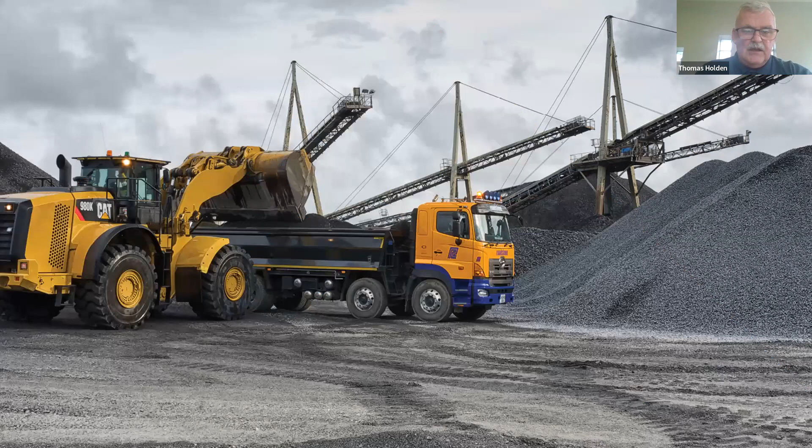The national standards have updated SR18, which is your aggregates for mortar. They've done a revision to that, published back in 2021. This brings mortar sand into line with the other aggregates for concrete and mortars, SR16 and SR21. It's gone from System 4 to 2+, so it has to be third-party certification on the production control and test results. It also set new limits on total sulfur and acid soluble limits in SR18 and SR21 - less than 1% on total sulfur and 0.2 on acid soluble limits. You need a petrographer's report and assessment of the sand pit, as with the other standards. So it's just bringing the aggregates for mortar in line with the other standards.

There's a systematic review of SR16 going on at the moment. It's ongoing - three subcommittees were formed off the main committee, looking at various aspects of SR16. They've finished up now and will be reporting back to the main committee, the Aggregates for Concrete Committee, or the Aggregates Committee in the NSAI. That'll probably go out for public consultation in the next 2 to 3 months. There are a few updates that were recommended.

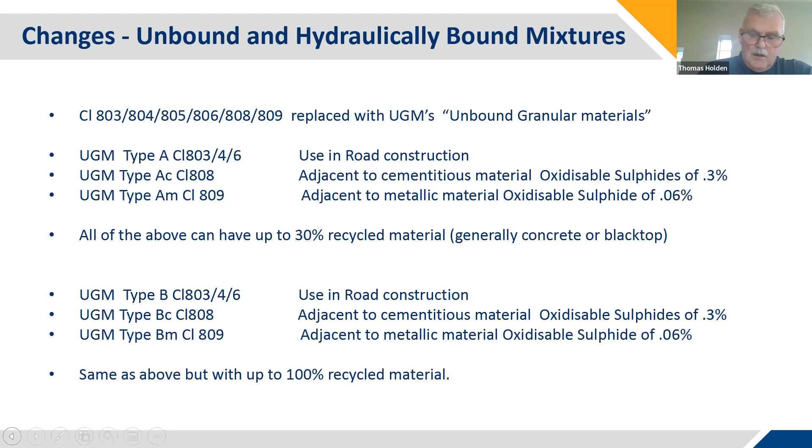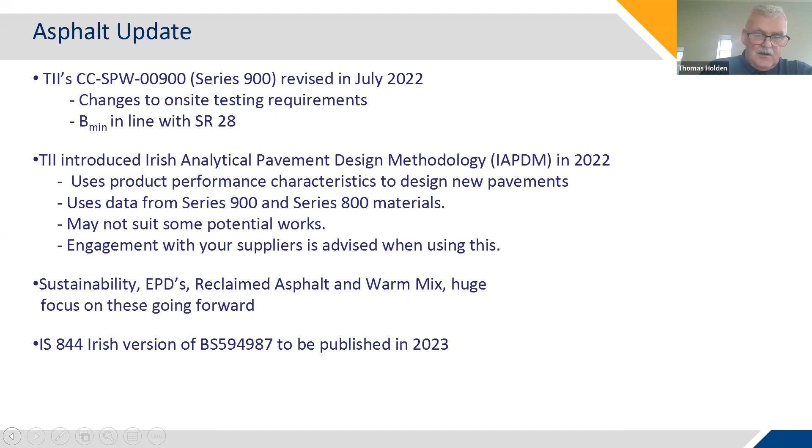The use of reclaimed asphalt, wrap, warm mix - there's huge focus on this whole area going forward in your design of roads and design of materials going down. And there's a version of the BS 594987, the IS 844, that's due to be published in 23. So that's probably gone through all the stages in the NSAI and is ready for publication.

Concrete, this is the one that I suppose there's a lot of changes coming down the road with EN 206, a revision to that. It won't be here for a couple of years yet, but when it comes, it's probably going to make a lot of changes.

They're going to split the EN 206 into two parts. Part one will cover performance requirements, factory production control, conformity criteria, and then part two will cover conformity assessment, inspection, and certification. Main reason for the division of the standard into two documents is to allow the concrete to be specified in part one and conformity in part two.

But the content's going to stay the same. It's kind of, we'll call it, changes for the sake of change and split the standard up.

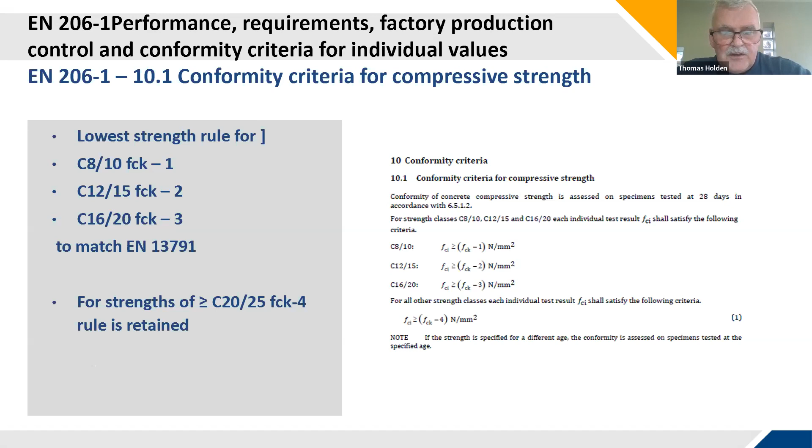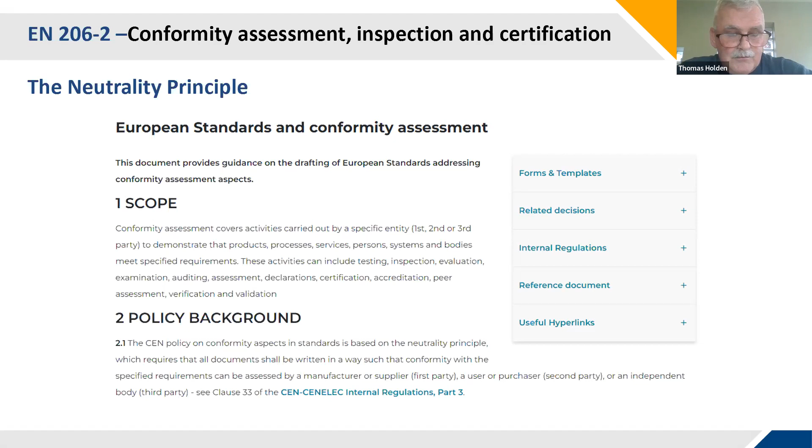The neutrality principle, again, your scope and your policy background on those two bits. For conformity assessment activities, including testing, inspection, evaluation, your auditing, assessment, declaration, certification, accreditation, peer assessment, validation, and your scope and policy background. Then for your assessment neutrality system, required documents shall be written in a way that everyone can understand them in simple terms, that all people involved in the standard or in the works would understand what the specification is about.

Now here in Ireland, every concrete producer is certified to EN 206. So you can't really supply concrete to any project unless you're certified. So I don't know where the plant without production control would be that you'd need extra testing here in Ireland. Possibly if you set up a site batching and you hadn't it certified, you'd apply the sampling rules for without production control.

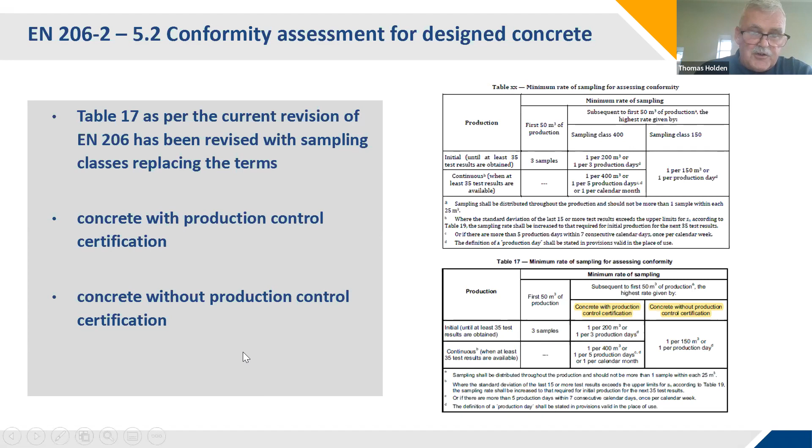Clause 10, evaluation conformity, has been removed, which is a little bit mad in my opinion, and I'm half delighted that again this thing goes out for public consultation and we draft up a new national annex to it - I'll be getting very close to retirement, because I think some of the decisions they're making in the new standards is a little bit nutty, but there you go.

And the identity testing has been removed - criteria for the mean result - and it is the responsibility of the first, second, and third party. So your supplier, your designer, your end user are going to have to agree on what level of identity testing would be required on site.

The requirement that 2 cubes are made and you take the average, that's been removed. And the requirement, the 15% rule between the 2 cubes - so if somebody makes 2 cubes and one comes in at 20 and the other comes in at 40, that's more than 15% between the two, you disregard the cubes or disregard the lowest cube. But that rule is gone now.

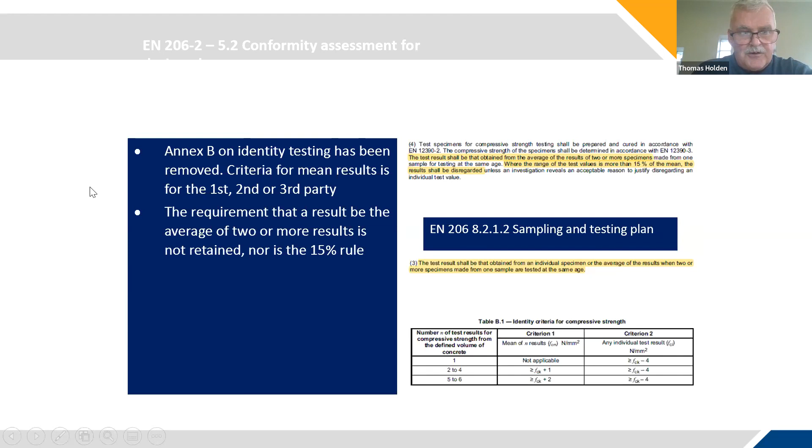Again, just to repeat what we said, that's criteria for mean result, your +4 - that's the same, and your 1.4 times standard deviation is the same.

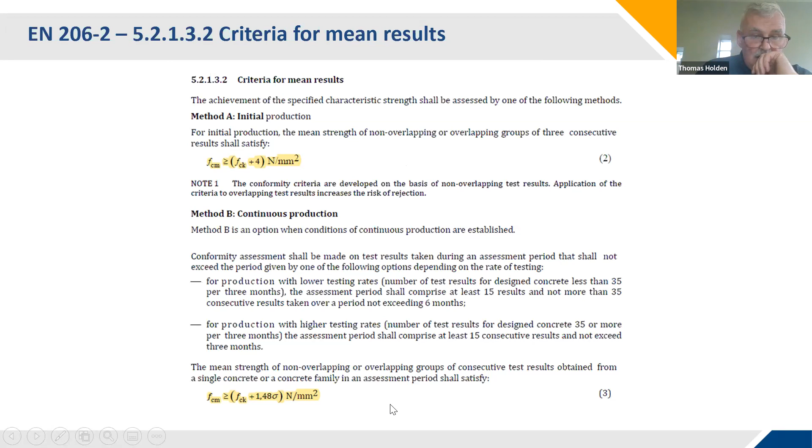Okay, your new classes of durability classes are also being proposed, where you would have exposure resistance classes.

So in Ireland, we have our durability table based on limiting values, and your holy trinity of minimum cement, strength class, and water cement ratio, and then you add in cover on that as your limiting values. But if you're going performance based or deemed to satisfy limiting values, I don't know how we're all going to agree on those limits.

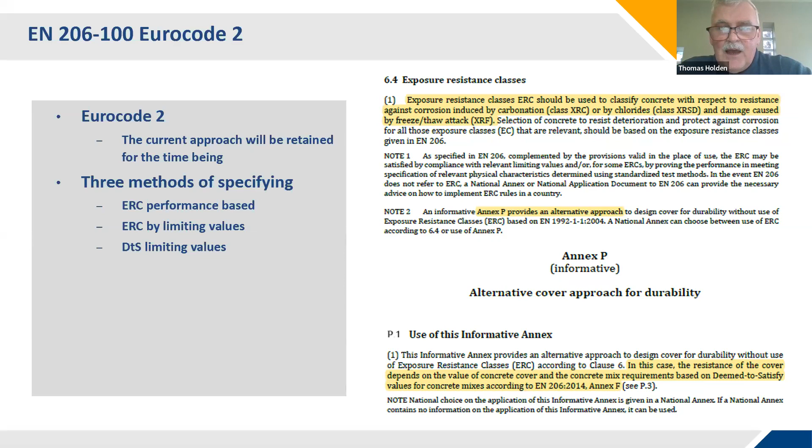It's very simple at the moment - everyone working off the tables in EN 206, the National Annex, and we work into limiting values. But this will only be for your carbonation and your chloride classes, freeze-thaw and sulfate resistance will still be based on your limiting values.

But performance based, we'll say for carbonation - all the stakeholders: your concrete producer, your main contractor, your subcontractor pumping the concrete, another subcontractor placing the concrete, another subcontractor putting up the shutters. He'll want to take them down, strike it at 14 hours. And does he cure the concrete, or what happens to the concrete when it's stripped?

And we're basing the carbonation performance on laboratory test results, probably done by academics in a college. Not that there's anything wrong with that most of the time, but with all your stakeholders involved, if you don't get the carbonation requirement right and the steel starts to corrode before your design life, out of all the stakeholders, who's going to be blamed and who's going to still be standing?

You're probably not going to get several of the subcontractors - the guy who watered down the concrete to pump it, or the guy who placed it and didn't vibrate it properly, the curing of the concrete, what broke down - and you've based your design life on exposure resistance class.

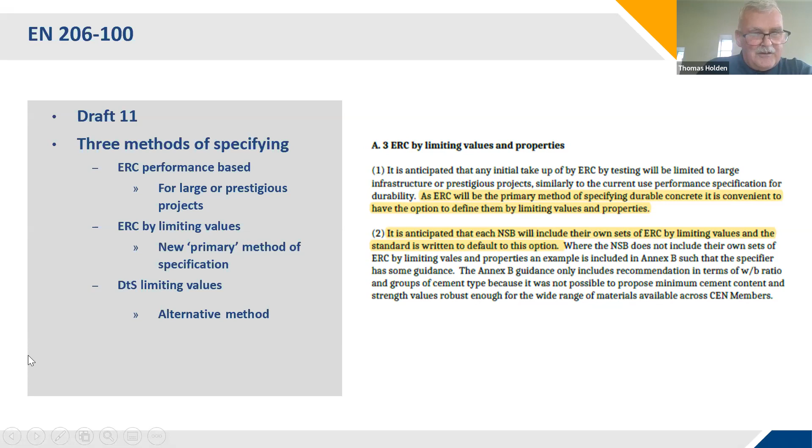Anyway, we'll move on - a bit on stone, a bit on blacktop, a bit on concrete. We'll move on to blocks, and as I'm the technical manager for concrete products, this is where the remainder of this presentation will hone in on blocks.

Back last year in April, the Department of Housing and Local Government published a guide to the marketing and use of aggregate concrete blocks to EN 771 Part 3 in Ireland. The background of this document is that the department felt that blocks, due to problems happening around the country, mainly in the northwest, needed a bit of scrutiny. So they set up a market surveillance team.

Market surveillance was set up probably 3 years ago. They started to audit block manufacturers, didn't find a whole lot wrong with the block production as such, but they did find that the DOP and the CE mark for the product were varied across the country - not discrepancies as such, but they weren't uniform documents. The layout of a declaration of performance is set in Europe in a certain way, with certain numbering systems and information that has to be declared. So market surveillance reported this back to the department, and the department then published this document.

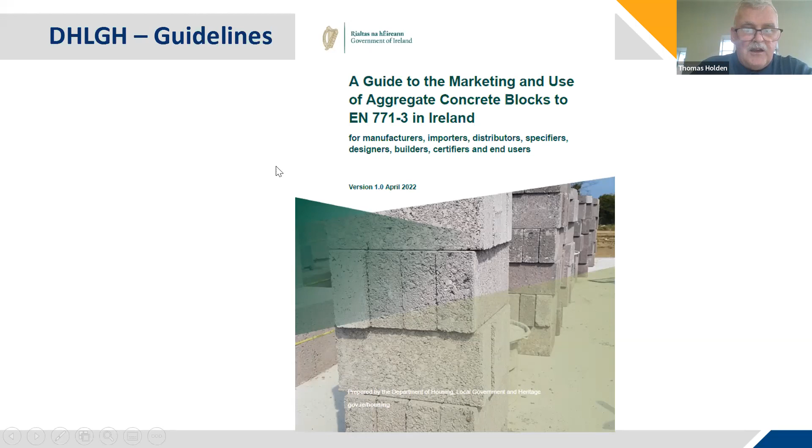It's a very useful document, goes through a lot of information for all parties. Your standard here is 771 Part 3 - that's your specification for concrete blocks, amended in 2015. The introduction of aggregate concrete blocks within the scope of 771 must have a declaration of performance and a CE mark, in place since July 2013 when BCAR came in. We adopted the construction products regulations back in 2011, made law in 2012-13. So every block producer in Ireland must produce a declaration of performance and the CE mark as a separate document, and that should have been happening since 2013. It was happening, but the documents weren't in the proper layout displaying exactly the right information.

So here's the information on the CPR. As I said, the regulation came into being in 2011, and that sets out everybody's responsibilities and the rules, regardless of where the products are manufactured - Ireland, EU member states, Northern Ireland, Great Britain, or other third countries. That's not just for concrete blocks, that's for all construction materials. It was adopted fully into Irish law in July 2013. So 9 years later, a clarification on what a concrete block should be and what it should be supplied to was printed by the department.

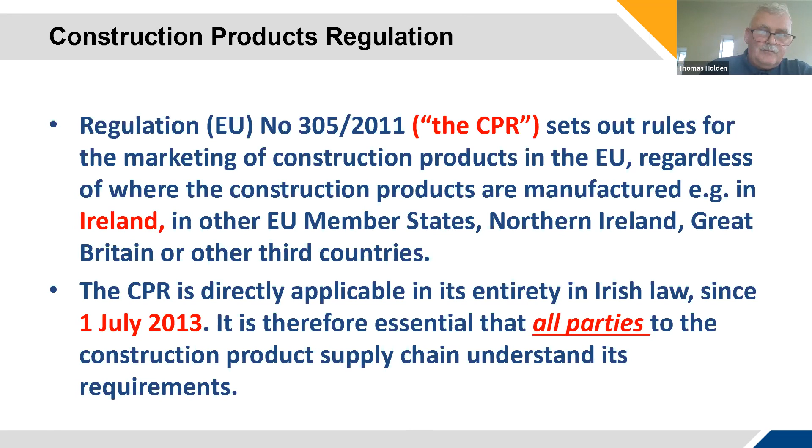Then the block goes to site, and it should be built to the building regulations - workmanship, materials fit for purpose, conditions of use, proper installation, and compliance with building regulations. These are all the responsibility of the owner, builder, specifier, designer, and certifier. The manufacturer is responsible for producing the block and declaring its properties to the standard. So if you're a manufacturer, importer, or distributor of the material, you're responsible for making the block to the standard, declaring the performance, and having a CE mark available. Enforcement of production is market surveillance, and enforcement of all the rest is building control. So that sets out the obligations very clearly for everyone.

National provisions - this is just a description of it - are standard recommendations that set out appropriate minimum performance levels. They're known as national provisions and can be found in guidance documents, technical guidance documents to the building regulations. So the majority are set out there, and they refer you to the Eurocode and to SR 325. They give minimum densities of block for sound and durability requirements in Part E and D. So we have a lot of national provisions, and they can all be found and traced from building regulations, technical guidance documents, out to the SRs, out to the ENs and codes of practice, and they're all there and should be used.

SR 325 is very important, there's a lot of information in it. Again, SR 325 and Part A, the building regulations, state that blocks in Ireland should be Category 1, meaning you're third-party certified to produce blocks. A notified body, the NSAI is one notified body, SLR is another, there's probably 2 or 3 notified bodies working in Ireland. Roadstone tend to predominantly use the National Standards Authority of Ireland, but you can't produce blocks in Ireland compliant with the building regulations unless you're certified to do so by a third party.

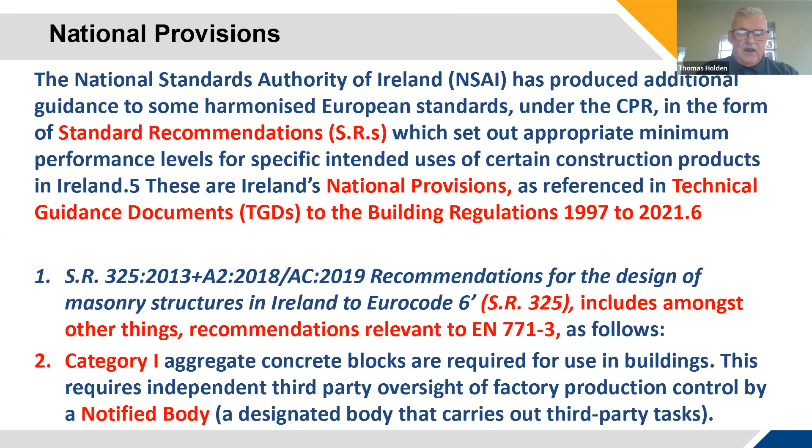Aggregate concrete blocks intended to be used in elements with structural requirements are required to meet the prescribed performances set out in SR 325. So density, compressive strength, moisture movement are the 3 that are in SR 325. The mortar classes are there. Achieve appropriate durability for finished work in Ireland, that's set out in 325 as well. And the aggregate used in the blocks has to be compliant and certified to 12620, aggregates for concrete, and the national provision set out in SR 16.

Again, you have to be certified to make the blocks, and you have to produce the blocks with certified material. So your sulfate levels, your magnesium sulfate soundness test, and your hardness test are all set out and provided as national provisions within the SR 16.

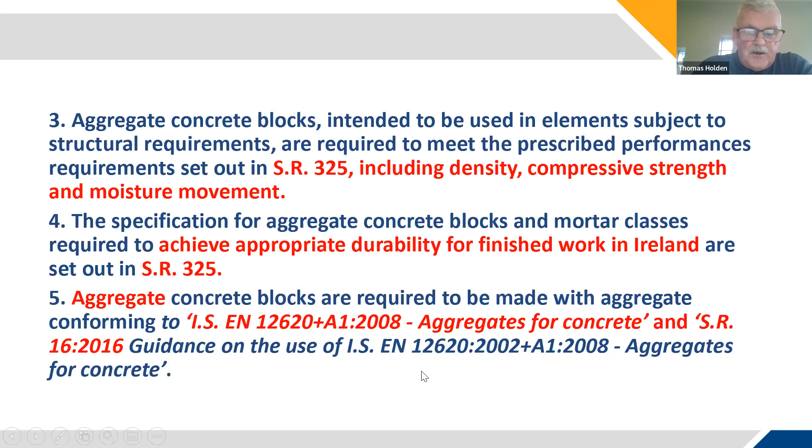So the declaration of performance - again, essential characteristics shall be declared, and that information on the DOP and CE mark must be made available on the market. Where national provisions do not exist for certain essential characteristics, or where some characteristics are not relevant to the intended use of the product, the manufacturer may decide not to declare a specific performance. In both cases, no performance determined, NPD, may be used and put on the declaration of performance.

Now, when you go through the national provisions, there's very few of the requirements in Annex ZA of the standard where we can use no performance determined, NPD, on the DOP, and I don't think I have any NPDs on the block DOP in Roadstone because we can match all the criteria back to a national provision.

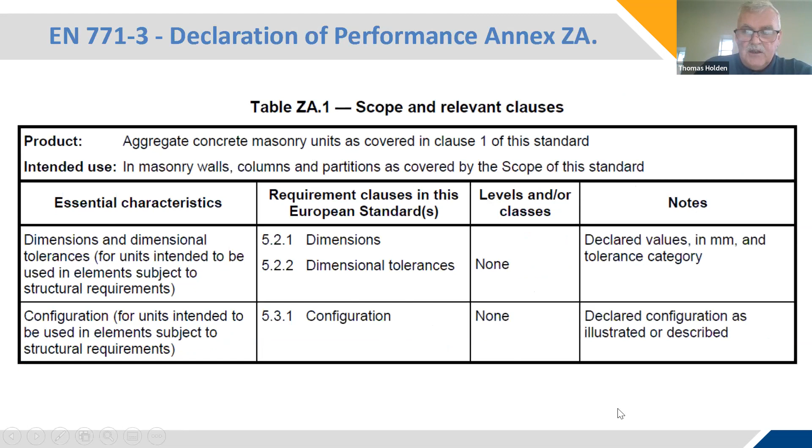So Annex ZA, here we go - this is where we go to find out what has to be done. So dimensions, tolerances, configuration declared, you're into compressive strength, moisture movement, shear bond, flexural bond strength, reaction to fire, your classification, water absorption, capillary, water vapor.

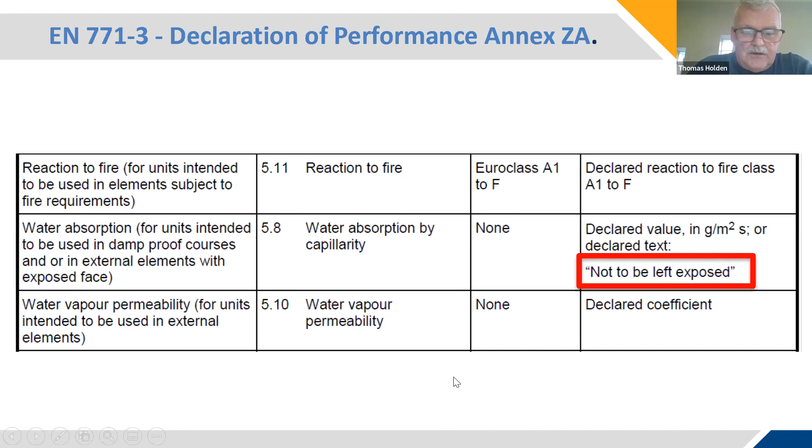Interestingly, the water absorption capillary has no value as such. It's not used in any design in Ireland, predominantly used for external elements with exposed face where water may penetrate into the cavity, or it may make the unit's face susceptible to frost damage through spalling. But there's no minimum declared value on the grams per meter squared per second, which is the value that is reported. So there's no minimum value, maximum value, or any reference to that value anywhere in standards or codes of practice that I can locate. So we have to declare the value, but the value is of no practical use.

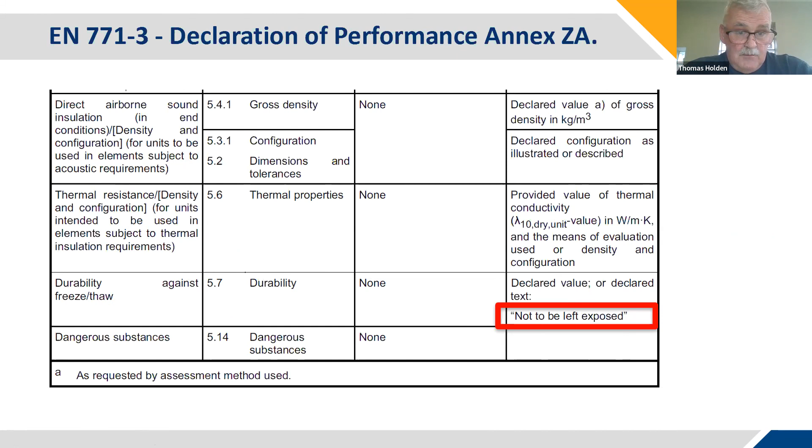So density, thermal properties, durability, and dangerous substances - again, durability, there is no test for durability for frost damage or durability testing. So 'not to be left exposed' was used, but when you go looking at national parameters and provisions, you can find durability requirements built into the building regs and SR 325. So the preference of the department and market surveillance is that these would now be declared on the DOP.

So there's a new layout of the DOP. The numbering system is as per the European guidelines, and the intended use is very clear, and the terminology 'common masonry unit' is defined in the standard EN 771 part 3 - a common unit is used with no face going to be left exposed. It's a common block, should be rendered, and that's the definition you would use. So fine texture blocks, which are going to be left exposed, or air leakage control blocks, which are going to be left exposed, would not be described as common masonry units.

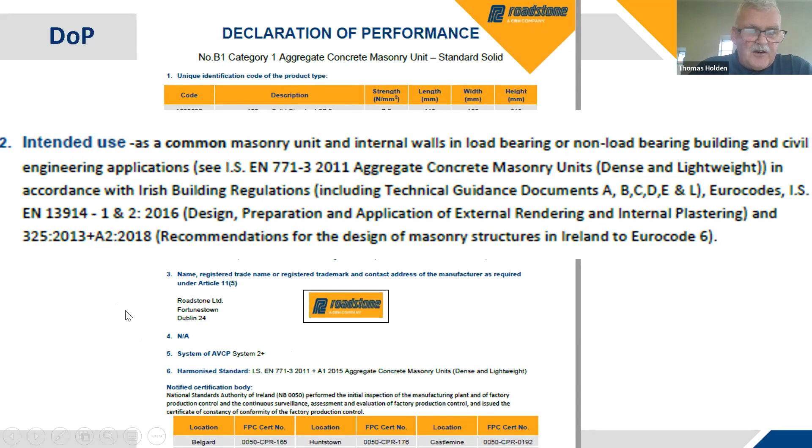Once you get into the DOP itself, the table of requirements, you see here the document now has a lot more information on it, and the national provisions and the performance are all set out, a lot more detail on the DOP. I think I've blown that up, yes.

So the standard block is designed to the conditions of use, exposure class, the density, the mortar strength class, the difference between 7.5 Newton and 13 Newton blocks. All the blocks should be produced with aggregates complying with 12620 and SR 16.

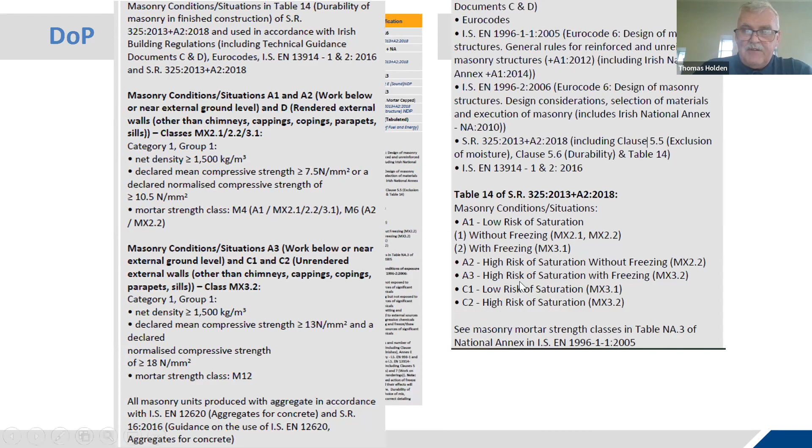And then we copy that on the column. We give the definition of the exposure classes, what they are, and that's all coming from SR 325, and it states where it comes from. The render code of practice, where you get the render mixes, how many coats you need, durability there, and the effects of freezing. So all that is copied from SR 325 and the code of practice for application of render.

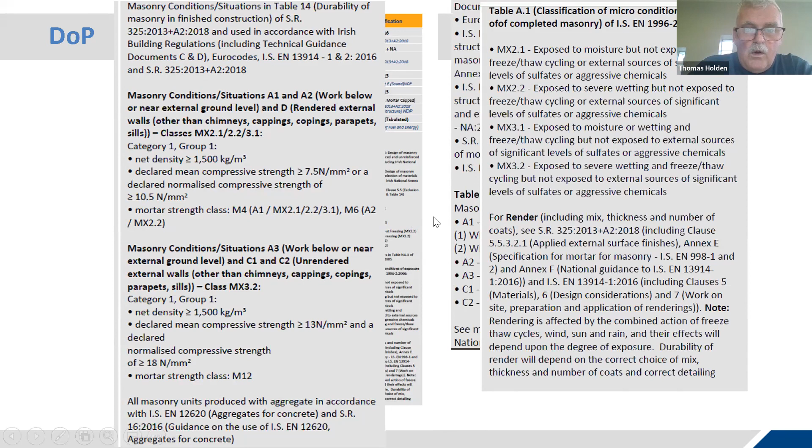So these are all what's now known as national provisions, and we've been requested by the guidelines documents to start declaring these on the declaration of performance, so that people know what a block is and where the block can actually be used and where it should be used.

Moving on to your moisture movement figure there, that's taken from the standard. Your reaction to fire, class A1, that's taken from Eurocode 6 1996 part 1-2, and the classification is based on the European Commission decision that there's no organics, so you have less than 1% organics in the block, and it cannot burn. So concrete block, we can stick the Class A1 rating on it because it's in line with the requirements of SR16. There's no organic material in there, so therefore it cannot burn.

So again, the document now has a lot more information on it. No performance determined is gone, and the national provisions are now being declared on the declaration of performance.

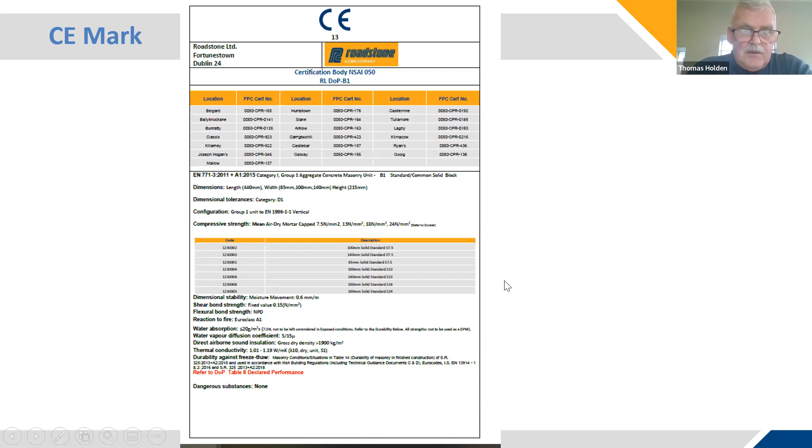And then that's all repeated on the document with the CE mark. So you have two separate documents: the declaration of performance that has a lot of information on it, and then that's summarized on a CE mark with the information and the CE stamp on it. Again, same amount of information, but it's a lot more toned down. Still, the information on what the block is and where it can be used is on the CE mark.

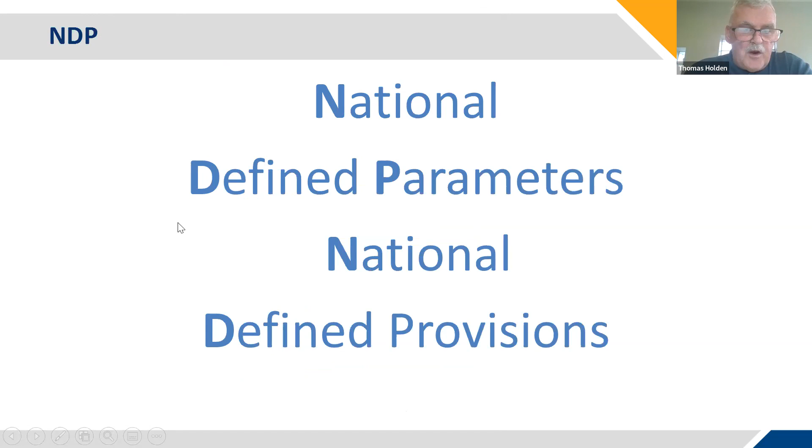So national defined parameters, national defined provisions, where do they all come from? Dimensions are set, so your tolerances are set on the standard, your D1, D2, D3. Now, invariably, most blocks in Ireland are set to D1, dropper blocks. Fine texture blocks, masonry blocks could be +1, -3, but that's very tight, kind of 214 ±2.

The old IS20 standard had your ±3 for fine texture. ±2 is a little bit difficult to achieve. Some manufacturers will declare D1 with tighter tolerances, as you're allowed. Some manufacturers will declare the D2.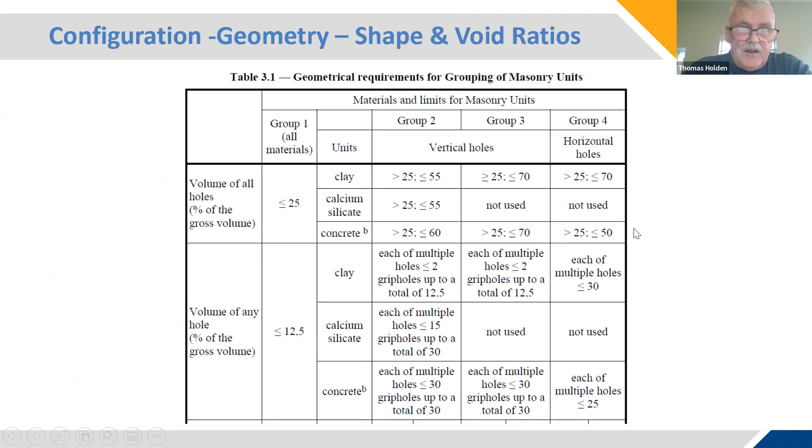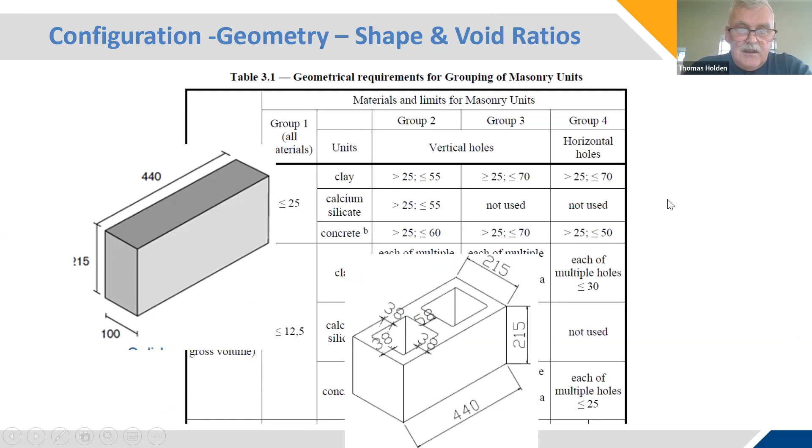Geometry of the block, this is taken from the Eurocode 1996 part 1. There's a table in there, table 3.1. It gives your classification for group 1, what it has to be, voids it can have, vertical holes, whether or not it can. Then group 2 is your cavity block, and group 4 is your horizontal hollow.

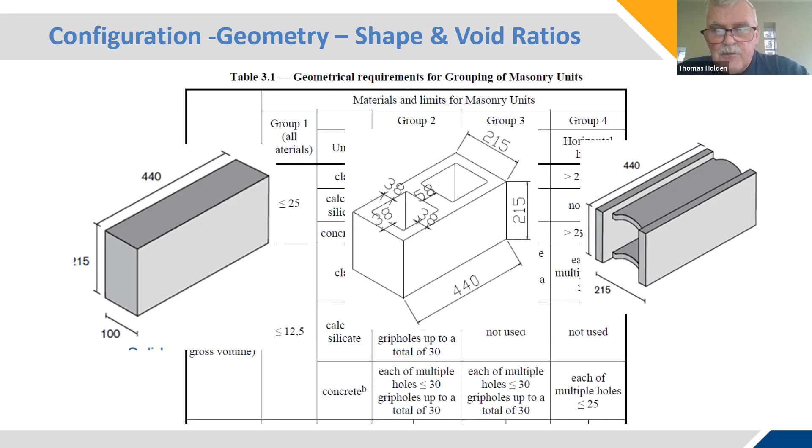We have stopped producing the horizontal hollow block because I cannot make it fit on the DOP anymore, as it is not covered in the building regulations, the technical guidance documents, or the Irish version of the Eurocode. So I cannot fill in national defined provisions or parameters for the group 4 block. We've kind of decided we would stop producing the group 4 block.

Density requirement: density 1900 kgs, minimum block weight around 18 kgs. That comes from your Part L or Part E sound. So it has minimum density 1900 kgs.

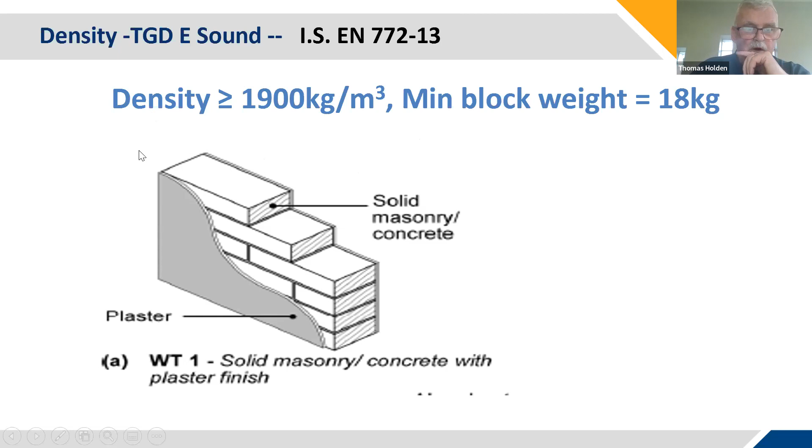So I suppose for handiness, and for not having 2 or 3 blocks in the yard, medium density blocks are down around 1500. The majority of blocks now in Ireland are greater than or equal to 1900 kgs density, so that they all meet the requirements of Part E sound, and there's no mix-ups on sites or inadequate party walls and dividing walls being built. They will all meet the Part E sound requirement, so you have your details there on how to use the block in Part E. That's where the 1900 comes from.

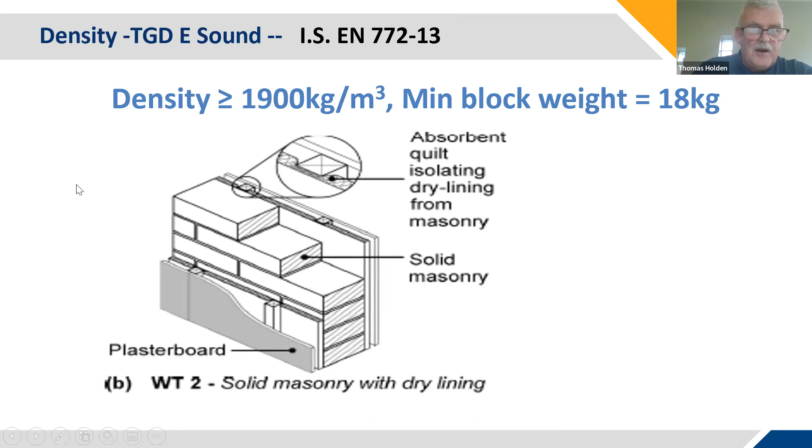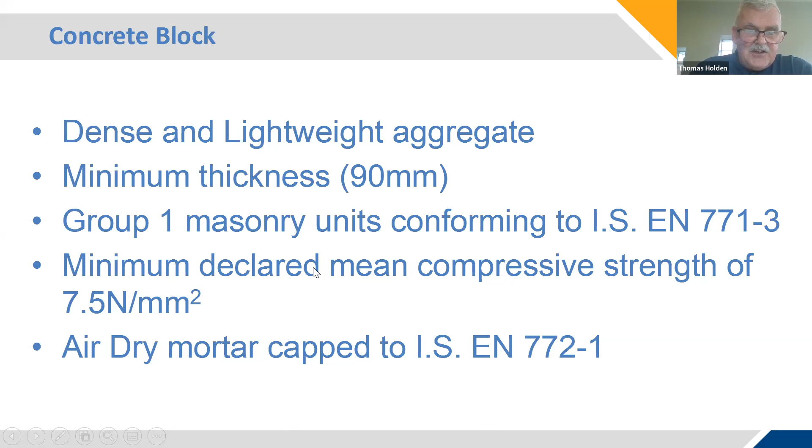Part A, structure: dense and lightweight aggregate blocks, minimum thickness 90, group 1 masonry. The specification for the block comes from Part A, your building regulations, your strength classification, and how it's to be crushed, air dry mortar capped.

The declared compressive strength has a probability of not exceeding 5%, so that's equal to 95% confidence. A block manufacturer making a 7.5 Newton block has to run statistics on that block and prove he's getting 95% confidence in the block. It can be mean or characteristic value, but the Irish National Annex to Eurocode 6 works off a mean value rather than characteristic, with level 2 plus third-party certification.

There's guidance on how to calculate your 95% confidence given in a CEN document, SG10. You have to run full statistical analysis on your production. There is a simplified conservative approach for small producers, but the third-party certifier likes to see the same guidance. It's not too hard to run the 95% confidence once you put an Excel sheet together, and the guidance is there on how to construct a sheet.

That's an image of kind of what the guidance gives. So you have your block tests, 6 tests, works out your XM, your number of blocks, your averages are there, and works over to your standard deviation, and then your estimated strength. Your estimated strength is the strength of the block with 95% confidence, and that always has to be above your declared value.

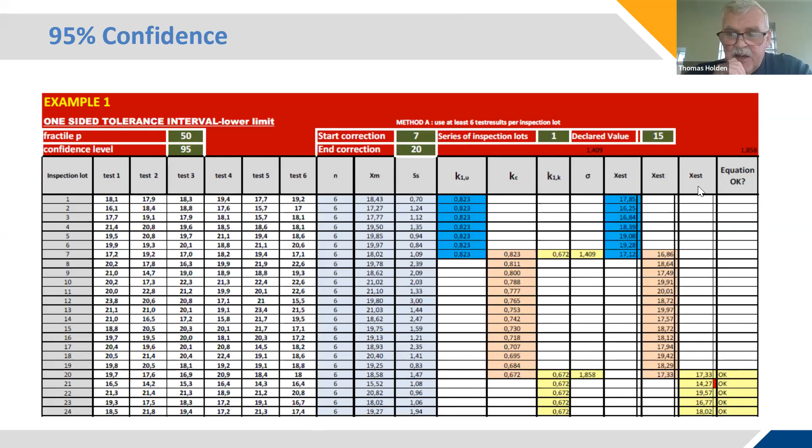Old and new strengths - we probably all know this now, but we still get guys looking at specifications every few weeks coming in looking for 5 Newton and 10 Newton, 15, 20. The old strength classes correspond to the new strengths: 7.5, 13, 18, 24, 36. Again, 36 Newtons at 95% confidence is coming out near 40 Newtons, and it's getting impossible to make a block that's 40 Newtons.

So we've made the decision to stop producing 36 Newton, and we'll probably declare a 30 Newton strength going forward. Very small sales of 36 Newton blocks anyway, but they were difficult to make when it was just an old 30. Making a 36 Newton is difficult, and having 95% confidence that you were always going to have a 36 Newton is just driving that strength up near 40 Newton. So for 100 mil solid, it's proving very difficult to comply.

As I say, that 36 is probably going to disappear - well, going to disappear in Roadstone anyway, and probably replaced with a 30. So designers, just take note of that.

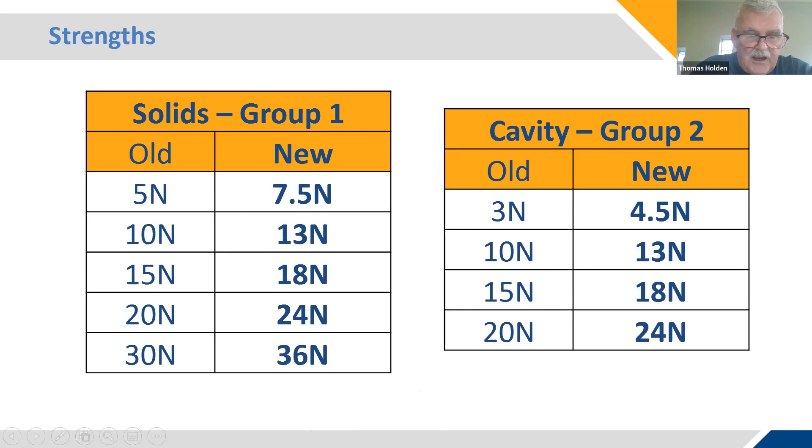Your Part L densities - your lambda value comes tabulated out of 1745. See here, your 1900 density will have your dense and light aggregate concrete units. So you're normally in this range here - 90% fractile of 1.09 would be your lambda value.

1.19 on 2000 density, so the lambda value declared is in this range here. It used to be 1.30, which would give you a density of 2100, but at a density of 1900, it's in the 1.09 lambda. So your thickness divided by your lambda gives you your resistance, or resistance inverted over 1 gives you your U value.

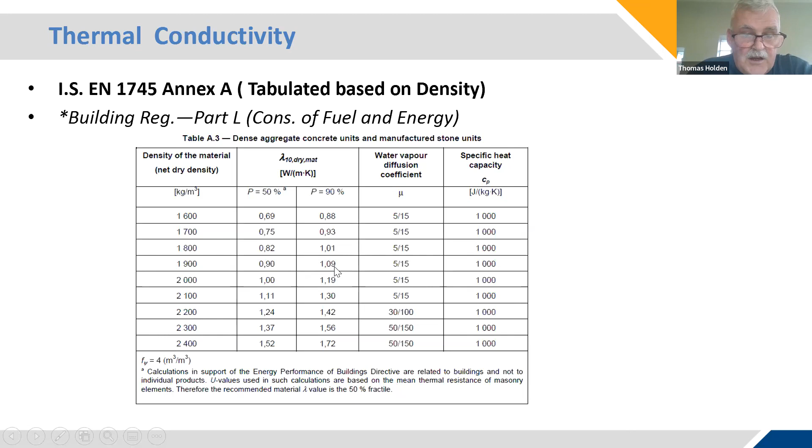Durability - this is a direct clause out of 771 part 3: where relevant to the use in which the units are put in the market, the manufacturer shall evaluate and declare the freeze-thaw resistance of the units by reference to provisions valid in the intended place of use, until an appropriate European standard is available. Unfortunately there is no European standard available to do freeze-thaw testing on a block.

There is one for a clay brick, and I would use the clay brick standard for testing exposed masonry, like our Fortcrete range, our Hunstown brick range, Hallmark and Keltstone, which would all be designed to be left exposed. I would do the 100 freeze-thaw cycles down to -20 as per the clay brick standard.

But there is no standard specifically for concrete block. The Irish Concrete Federation and Technological University Dublin, Bolton Street, are running tests at the moment, trying to develop a test method, and that will probably be presented in NSAI going forward as the national test method for freeze-thaw on an ordinary common concrete block.

And then the note - I used the terminology common block for my intended use, meaning standard block. So when the intended use of a product provides complete protection against water penetration - suitable layer of render, cladding, inner leaf, cavity - no reference to freeze-thaw resistance is required.

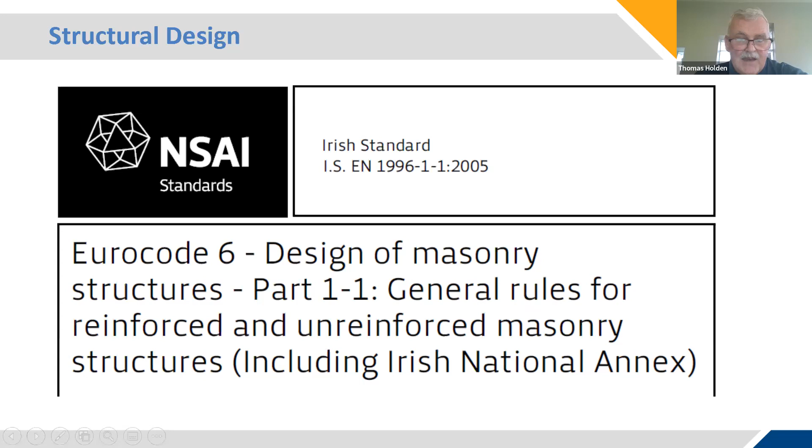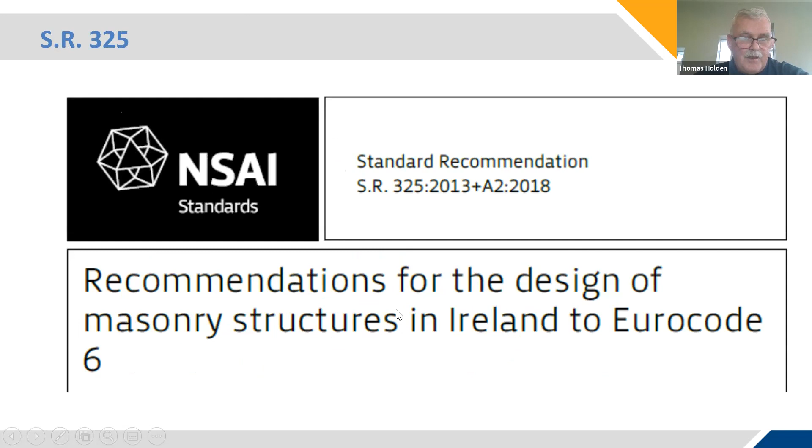And the masonry panel is looking at revising table 14 of SR 325 in line with a new meteorology map that's been published also, that I'll cover in a few minutes. Again, so this all comes from Eurocode 6 design, and SR 325 references the 326, and we go into the durability tables then that are in SR 325.

So here's an example. We have our A1, A2, and A3, and that brings in your European classes of the MX. So low risk of saturation, MX 2.1 and MX 2.2 without freezing. Low risk of saturation with freezing. High risk of saturation, but the blocks are not going to freeze. And then A3 is high risk of saturation with freezing, MX 3.2.

So the A1, an ordinary 7.5 Newton block. In M4, you go to A2, you increase the mortar, but the block still says 7.5 Newton. You go to A3, it recommends the use of a 13 Newton block and puts the mortar strength right up to M12. And that's out for debate at the moment, and lots of chat on it.

And another engineering body recently published guidelines recommending the use of a 13 Newton block in areas of saturation with freezing. And if you can't rely on the render, the block is going to get wet, so it's going to get saturated and going to freeze.

So as I say, that's topical at the moment, but that's where your national provisions are for durability against freeze thaw. It's based on concrete block strength and the exposure classifications that are in Eurocode 1. And I would think 1996 Part 2 would also have those classifications. Eurocode 1 would have the frost map.

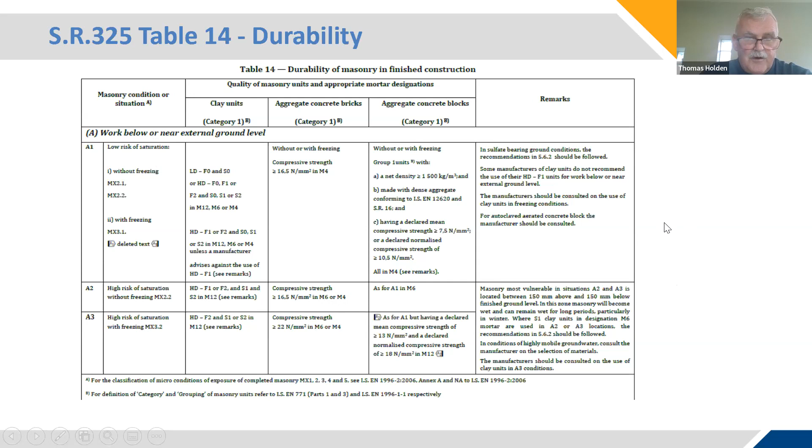SR 325 has the wind-driven rain map. So high risk of saturation with freezing, again, your strengthened block, and it says that that should be used kind of in the footings above and below the footpath, where it's likely to get saturated. You should stick in a 13 Newton block to protect the plinth from damage.

Then another, I suppose, national provision, like for durability of the block, is the blocks would comply, the aggregates used in the block would comply fully with SR 16 and would have a magnesium sulfate soundness for durability value of less than 25. So this is where the provisions come from for durability. The Eurocode SR 325, and then the aggregates are sound and not susceptible to frost damage.

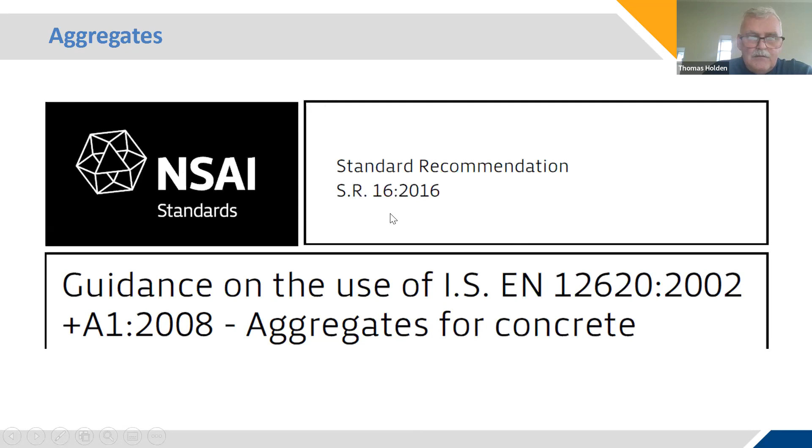So again, the aggregates for concrete SR 16, advice on that: dense aggregate greater than 2000 kg per meter cubed. And in the scope of that document, back in 2016, it was amended to include concrete blocks, so concrete masonry units, e.g. blocks, precast paving, precast concrete products, pavements, roads.

But just because it's not concrete to EN 206, the SR16 was amended to include all that the aggregates used in concrete products and concrete anything should comply with SR16. A bit of a loophole there that some people said, oh, you don't need to use concrete aggregates complying with 12620 in other products that are not covered by EN 206. But as I say, the standard was amended in 2016 to make it clear that anything that's called concrete should have aggregates complying with aggregates for concrete.

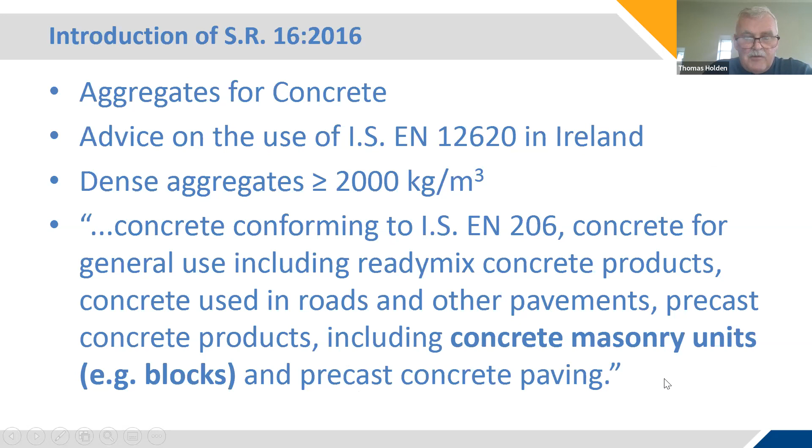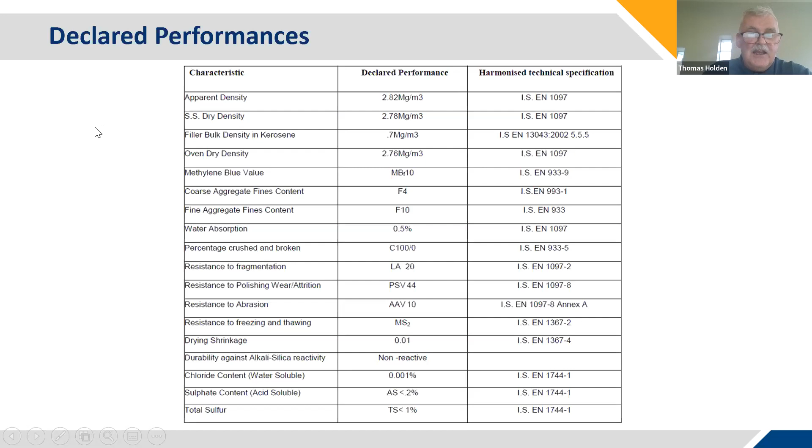And then these are the properties set down in SR16. So you have your LA of 20, you have your flakiness, you have your fines contents, you have your magnesium sulfate value, and your chloride and your acid soluble and total sulfur contents are all set down in your SR16.

And at the aggregates then, geological assessment by a professional geologist, we use SLR, and we have to visit the quarries. Some quarries are visited monthly, some are visited annually. It's all dependent on the volume of aggregates we extract from a quarry or a sand pit. They'd all be visited annually by a professional geologist, and they would declare, carry out the chemical testing, do visual analysis, and declare that the products produced in that quarry or sand pit are suitable for use in concrete.

So I get asked this question a lot and send out a letter that you've got no deleterious materials in your aggregates, but we can't have deleterious materials in our aggregates because they have to comply and tested for all the requirements of SR16, 12620, and then the professional geologist has to have his survey done and his chemical analysis done and do a declaration of performance for the producer that the aggregates are suitable for use in concrete products.

So durability of the block: presence of applied external render and finishes, quality of workmanship, seasonal types, masonry unit, mortar composition, joint finish and profile, thickness of inner leaf, and thickness of the outer leaf. These all play a part in the durability of the block.

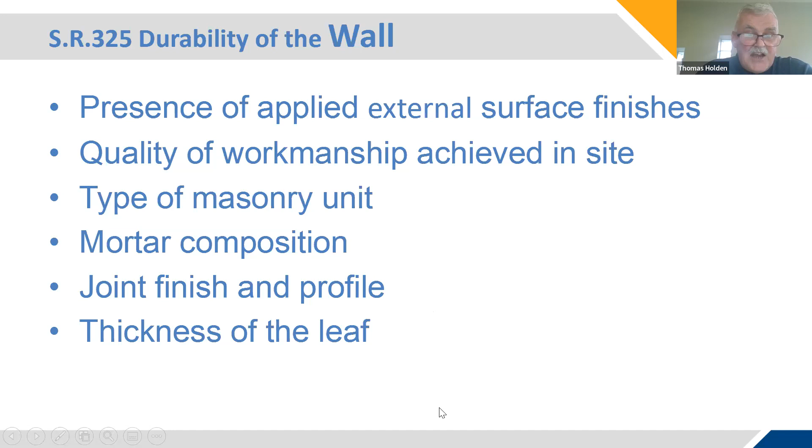So that's all minimum leaf thickness, 90 mil. These are all national provisions and they're all in the standards and should all be followed.

Durability, presence of the cavity, the width of the airspace within the cavity, recommended of a 40 mil airspace for air circulation and keeping that outside leaf dry.

So the use of full fill insulation, is that covered by SR325 and the Irish building regulations?

Architectural features to keep the wall dry, overhangs, the type of wall tie, wall ties per meter squared.

You see diagrams, wall ties, you need extra wall ties up openings, you need extra wall ties along your gable, and out on site at times I don't see a whole lot of these extra wall ties being put in at openings or at gables.

You might be lucky to get the 4 wall ties per meter squared, but the extra wall ties and the type of wall tie used...

The wall ties in Ireland are to an old Irish standard. There's some imported wall ties coming in, and I'm not too sure that they would all comply with the Irish provision set down for the wall ties.

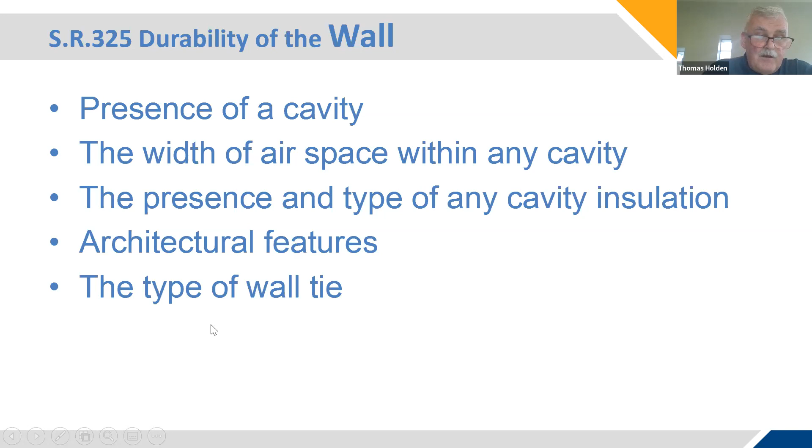Water absorbency, generally less than 20 or 25, but there's no limits on this set anywhere.

Again, the guidance in the Annex ZA said not to be left exposed, not to be used as a DPM. In Ireland, we don't have any clay or tile or masonry product that you would use as a DPM as such, so there's always a proprietary DPM put in.

This property is not required by IS 20 or the Irish building regulations. As I say, it is used some places, but I cannot find a value for water absorbency that's meaningful for use in Ireland when applied to Irish conditions.

But again, we've been required by the guidance document to do this test and declare the value.

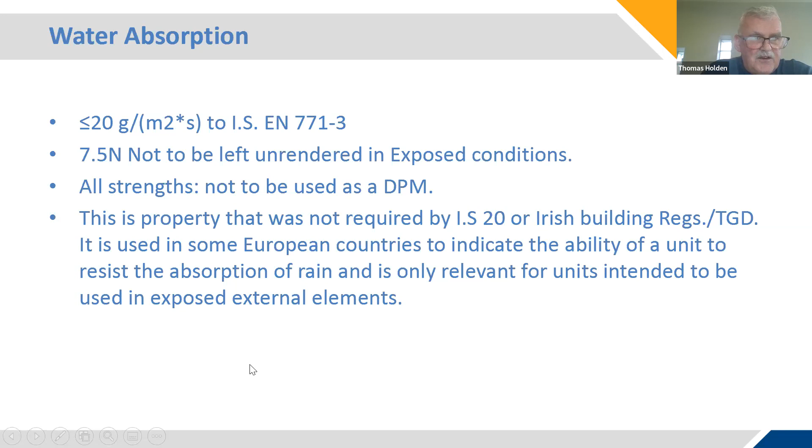Moisture movement, again, this is a national fine parameter, so 0.6 of a millimeter per meter. Expansion or shrinkage in the table, 0.6. This used to be...

0.06% in IS 20, so you work out millimeters per meter, it's the same value, but the test in IS 20 was drying shrinkage. So that's a new value.

I'm just looking at my clock. This presentation is going on a bit longer. I better start moving it.

So moisture movement, again, that's our SR325 moisture movement. Guidance on that, not greater than 7 meter centers.

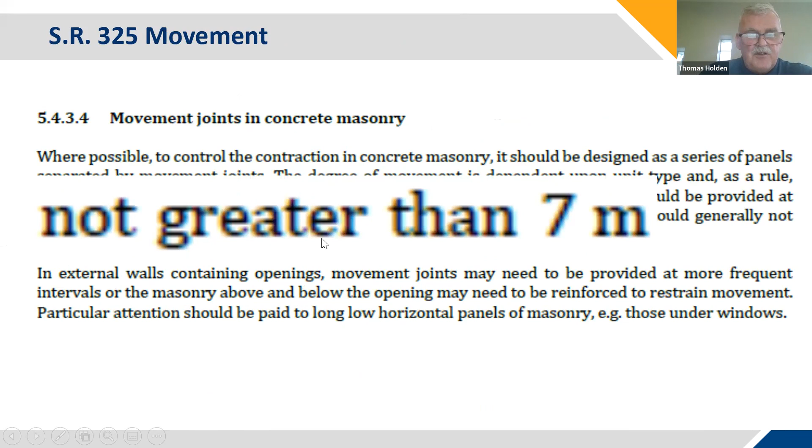Again, national site provision. Use of movement joints should be designed in. I go to too many properties, too many houses, cracks in them.

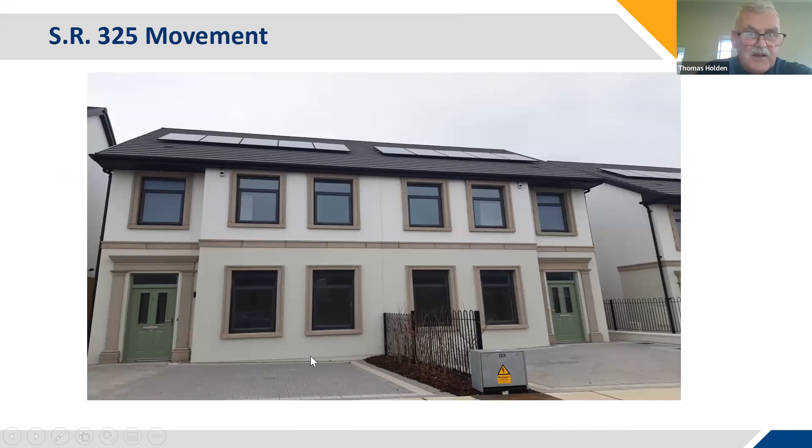You walk around the property, no movement joints. They're very easy to design in and can be hidden with coloured mastic and a nice bead there. So movement joints are essential and should be used.

Here's an example of a pier restraint, 2 cracks down either side of it. Could be very easy to put in a joint there by putting the bead all the way down to footpath level, but it wasn't designed in, and lovely cracks resulted.

Water vapor permeability, this is not a requirement, not included in IS 20, but it is declared, and it's a declared value, tabulated value from 1745.

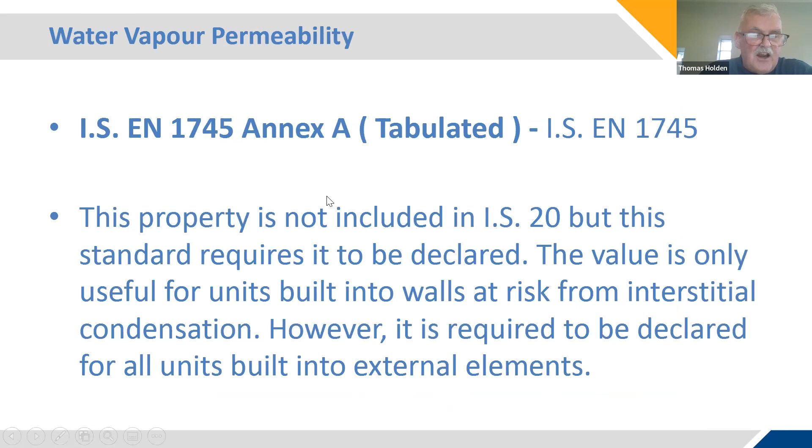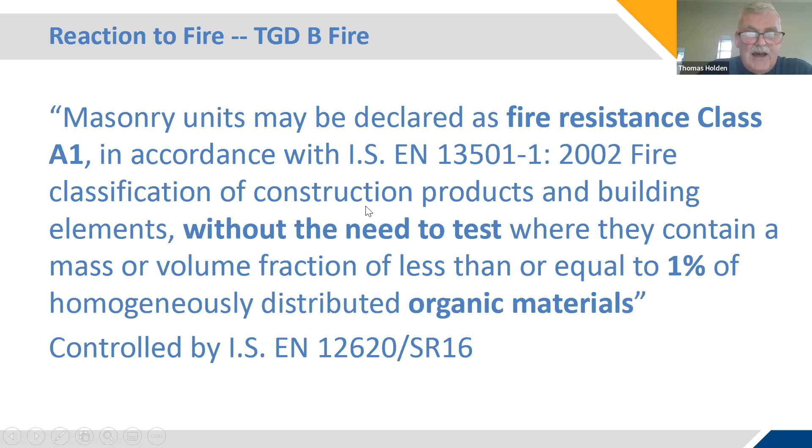Reaction to fire, again, I covered this, you know, no need for test because there's 1% homogeneous distributed organic material. So you don't need to test, just stick the A1 class on it and you take your fire ratings from the 1996 part 1-2. So there's 3 tables in there, 3.1, 3.2, 3.6.

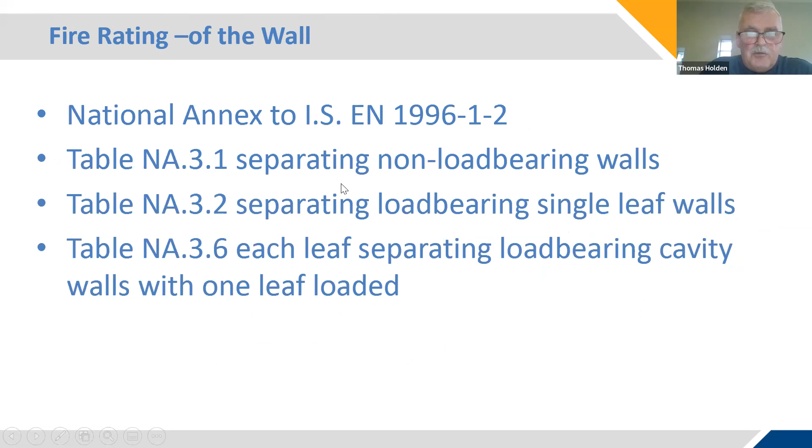So separating non-load bearing, separating load bearing, and each leaf of separating load bearing cavity wall. That's where we take our fire ratings for the wall from. The blocks generally have A1 classification, but the fire rating of the wall comes from 1996 part 1-2.

And very simple to use. Go into the tables, you have your minutes across the top, you have your wall thickness and your aggregate, your block type. So you follow the cross, go up your 240 minutes.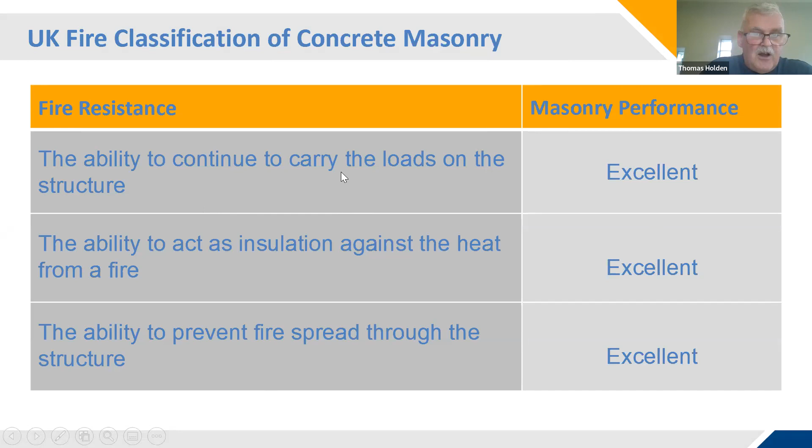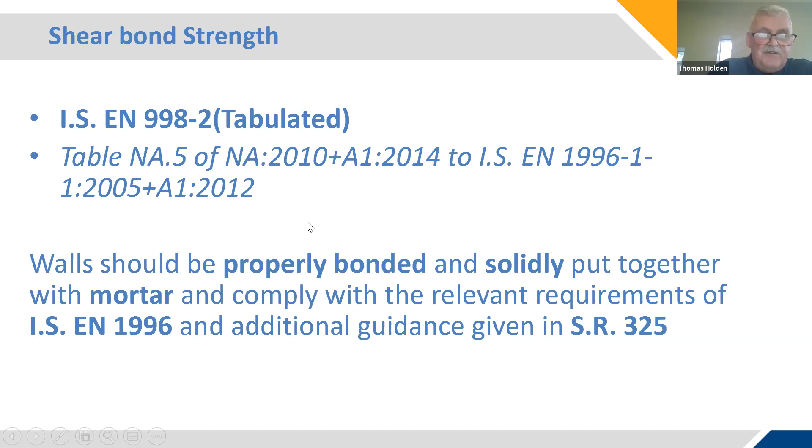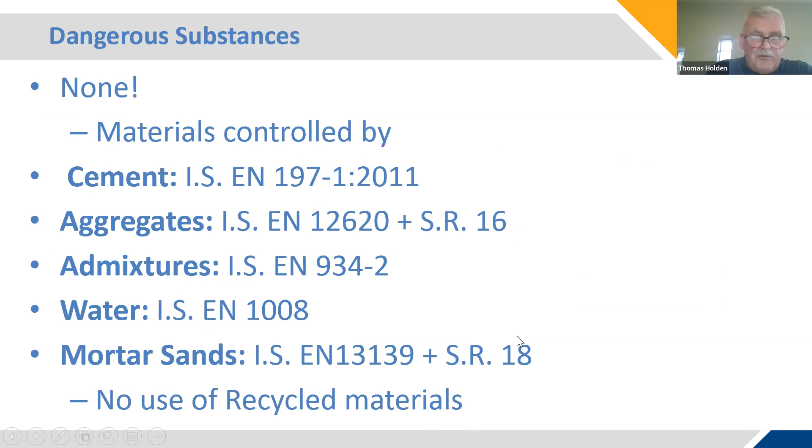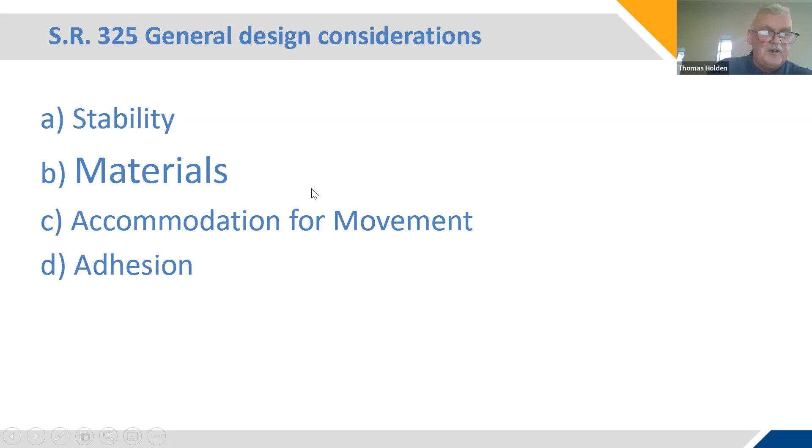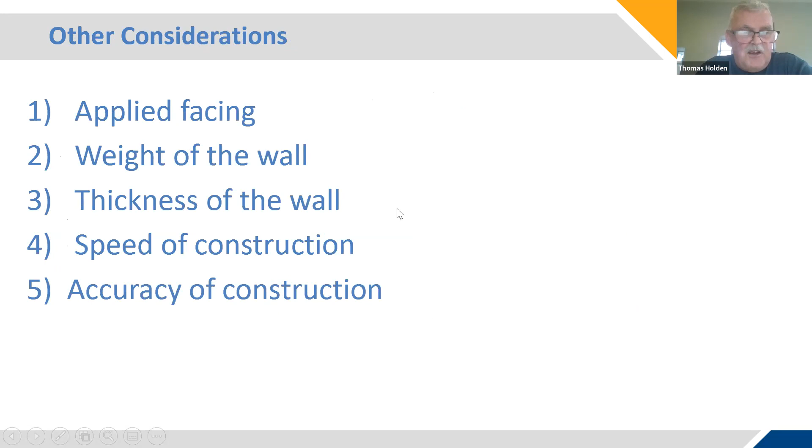That's the definition of the wall. Going through what's required by the wall in SR 325: stability, materials, accommodation, movement, adhesion, resistance to movement, penetration, durability, fire, masonry bond, bedding, workmanship, and other considerations like applied facing, weight of the wall, thickness of the wall, speed of construction, and accuracy of construction.

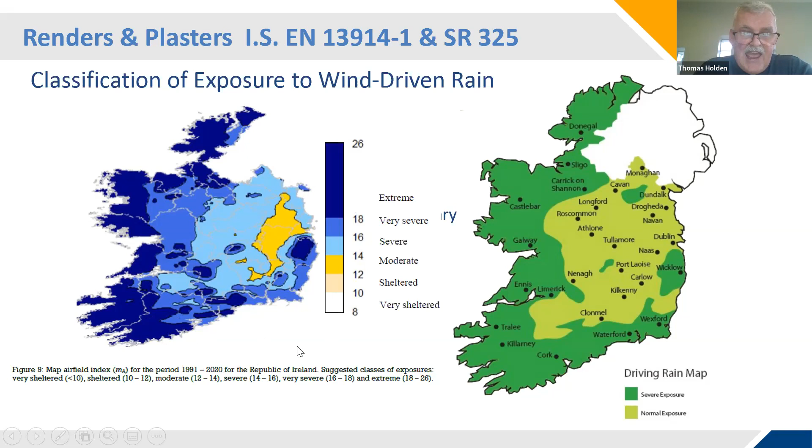Renders, again, wind-driven rain. We used to have these classifications, but we now have a new map, only published last year. Where we had severe exposure, it's now gone up to extreme, shown in dark blue. The revision of 325 will take this map into consideration and work on whether we need newer provisions based on the extreme weather now along the west coast, or whether it's extreme in name only and still the same as severe. But with climate change, it's probably gone up a notch or two. This is the new map versus the old map.

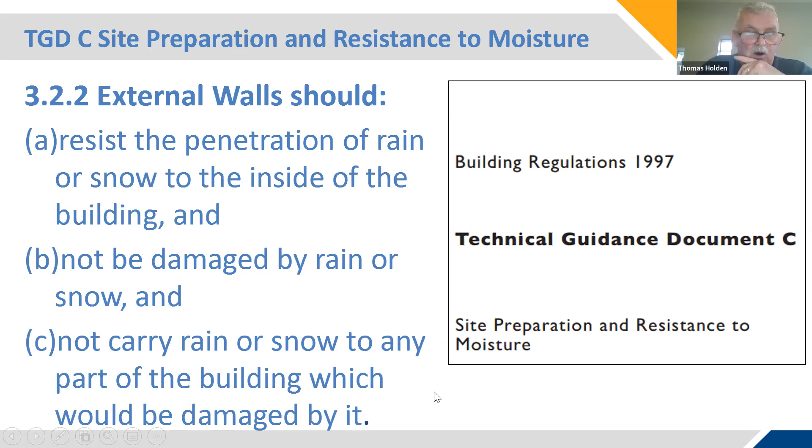External walls should, per technical guidance Part C, resist penetration of rain and snow into the building, not be damaged by rain or snow, and not carry rain or snow to any part of the building which could be damaged by it. So the wall is part of the building, and we have to protect it from damage by the weather. Part D covers resistance to moisture, again condensation, so your 40 mil airspace lets the wall dry out. It should prevent the passage of moisture to the material, or the material should be treated or otherwise protected from moisture. So does your render work to protect the block? These are requirements of Part C and D of the building regulations.

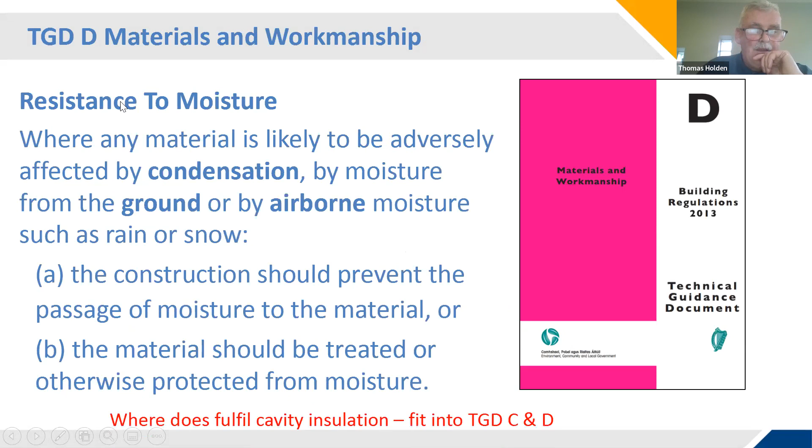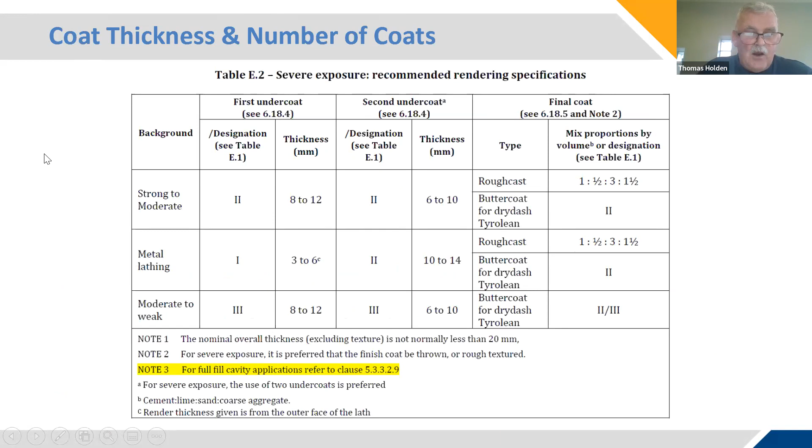Design, preparation, and application of the render should follow this standard, and your coat thickness is in 325. Your number of coats and coat thickness all trace back to your durability map and your wind-driven rain, and how wet the wall is going to get. So it's all there: your first coat, second coat, final coat, whether you use 2 coat or 3 coat finishes, depending on durability.

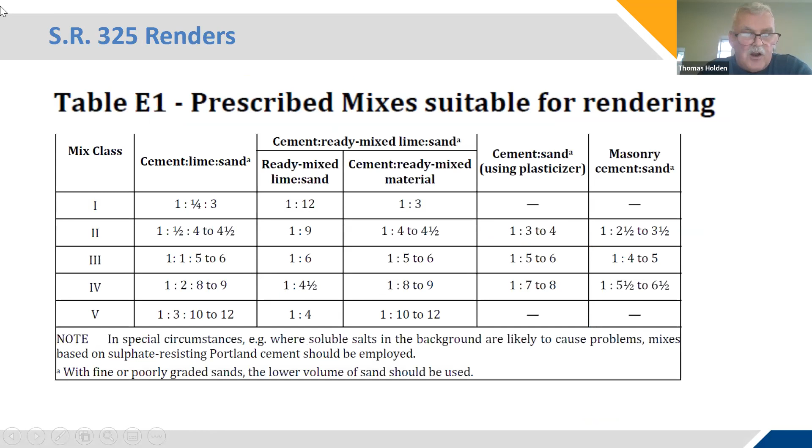Prescribed mixes give you your mix design for the renders, prescribed mixes, not design mixes. So if you're buying bag mortars or bag renders, you should check whether they're designed or prescribed, and who's going to sign off on them once they're designed if they don't meet these proportions.

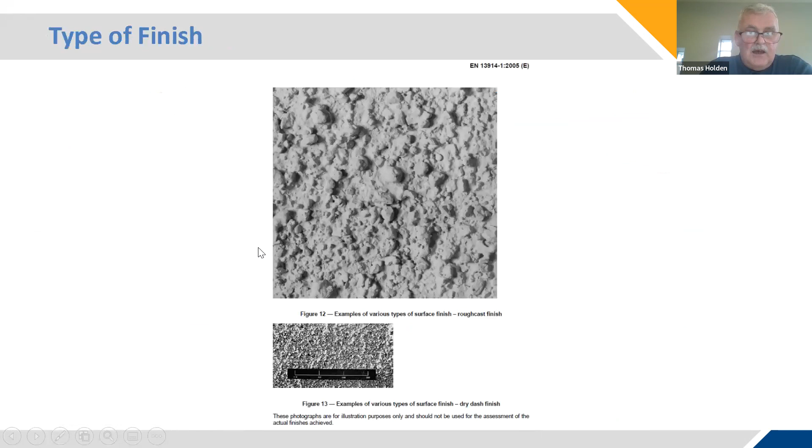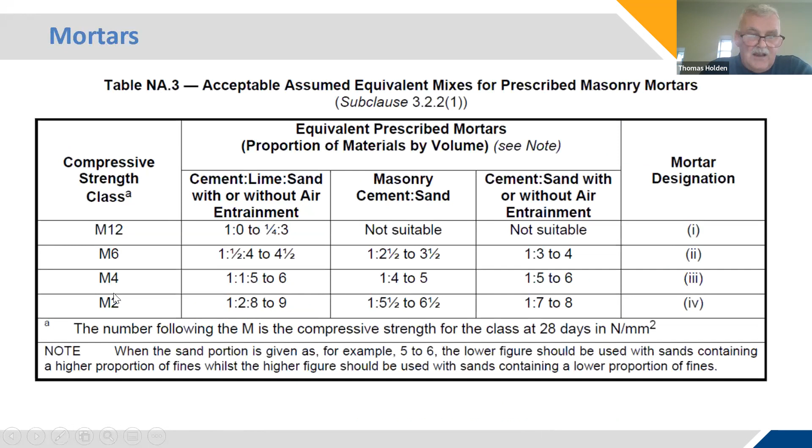Mortars are 998, which gives your texture of mortars. Again, masonry mortar, these are your mortars used in build, again with prescribed mixes. Your M4 is your old 1:1:6 recipe.

None of what I showed today is new. It's all been covered and can be traced back to the old standards, the majority of it anyway. We had IS 20 from '74, Irish Standard 5 has been there since '74, 325 since '86, Part 2 since '95. Before that we were referenced out to BS 5262. These are BRE Digests from '71, and BS 5262 from '76 and '91. So there's always been standards there, and they've all covered this.

Just to prove it, this here I think goes back to '71. Your wind-driven rain, that dark grey with the 10 out here, if you overlay that map on the new map, all that west coast of Ireland is still in your severe category for wind-driven rain, and this should have been taken into account in design.

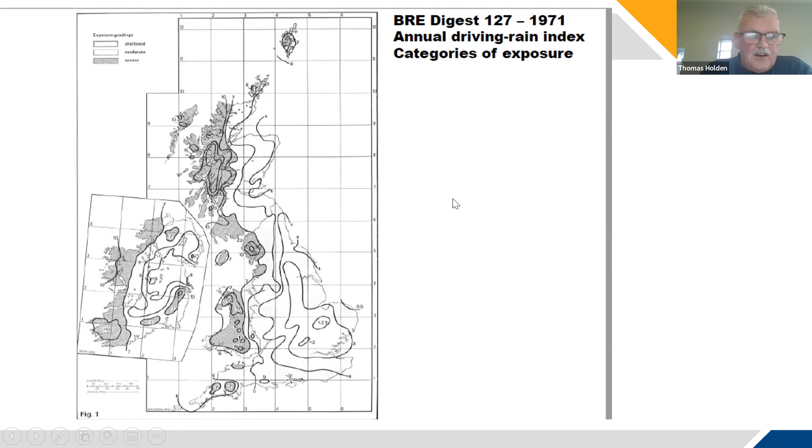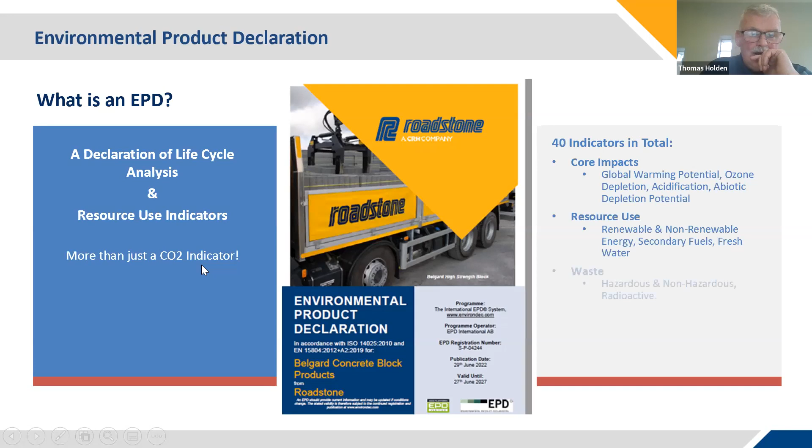EPDs are becoming popular, and we have set out to get EPDs on all our products. We have, I suppose, 3 of them done: thermal light block, paving, and our concrete standard block. So that's it.